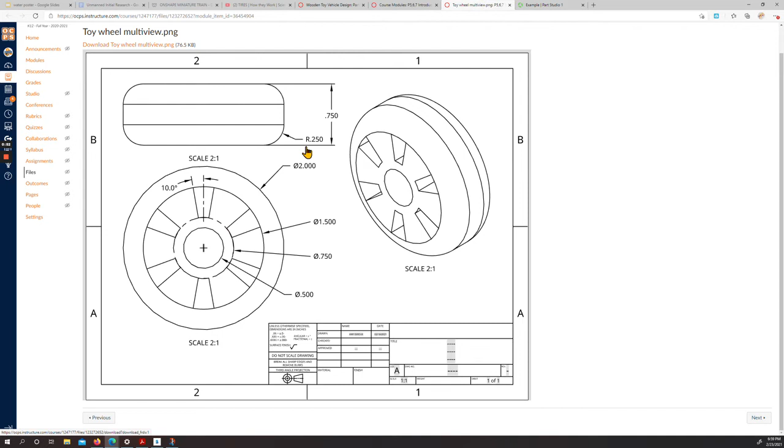We do have our 2-inch wheel. That wheel is given to you in the multi-view, and we need to use this specific wheel for your toy, but otherwise the rest is mostly up to you.

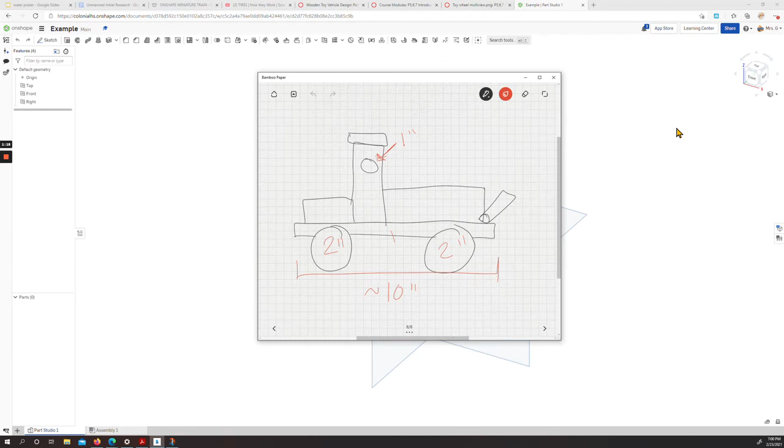This one here has the base, our front end, our cab, our back end, and an openable rear. So we're going to take some time and model out this example, and I'll show you guys a little bit of how we can go from picture to 3D model. Alright, let's get started.

First, we are going to select a sketch on our front plane. I'm going to either choose the N key on my keyboard, or click on the view cube up in the corner. What we'll start with is just getting the general size and shape of our object, but I'd like to start with a center point rectangle to keep everything centered along our initial plane here.

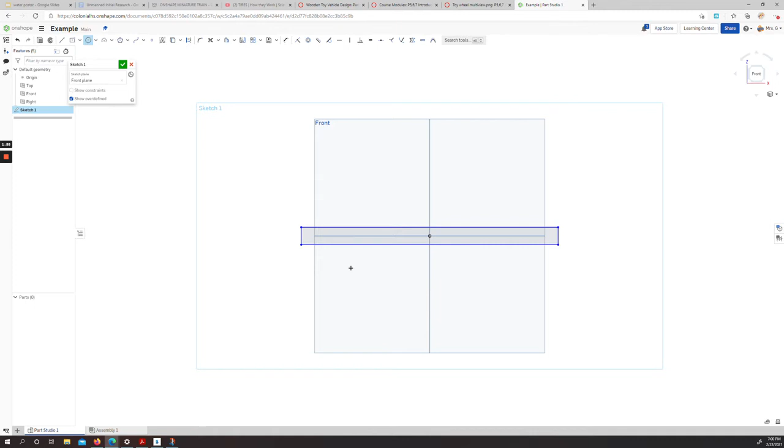So starting out, we're going to have our base, and then I'm just going to make two 2-inch circles down here as placeholders. We will be making these wheels separately, but at least having our wheel size will allow us to get a better handle of what size we would like to create our other shapes.

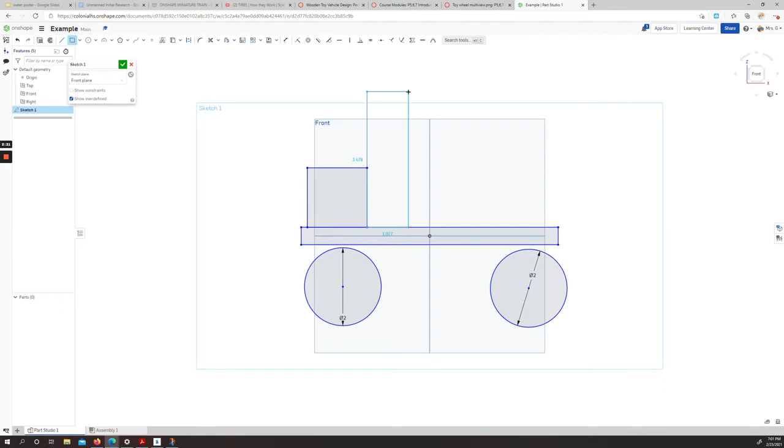In our drawing we had a rectangle, a taller rectangle that had a little roof, and a couple pieces of a trailer bed back here. Just for now, we'll start something like this. This back end needs to change since we'll wind up having movable parts, but at least for the sake of visualization, this is the beginning of our vehicle.

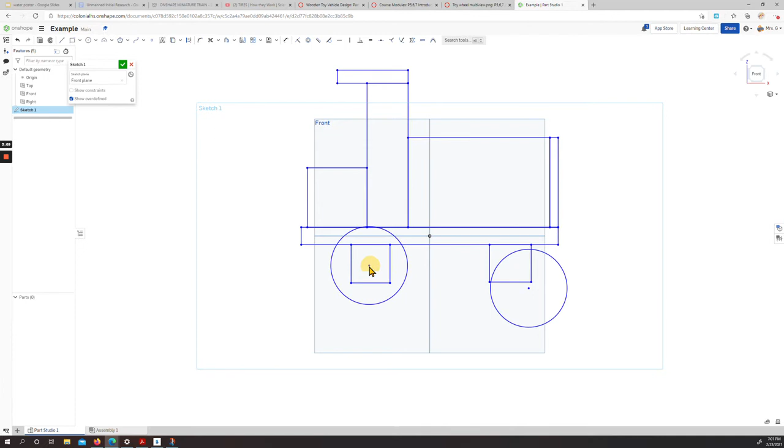If we're noticing, do you remember our train that we created, you guys? We had wheel blocks for our axles to set in. For right now I'm creating two of these just so we can visualize it, but when we actually create, we only need one, because remember in our assemblies we can do multiples.

But this is our general scope of the shape that we wanted in this example. So let's grab our dimension tool and start to give ourselves some sizes here. Most of our measurements we want in quarter-inch increments or so.

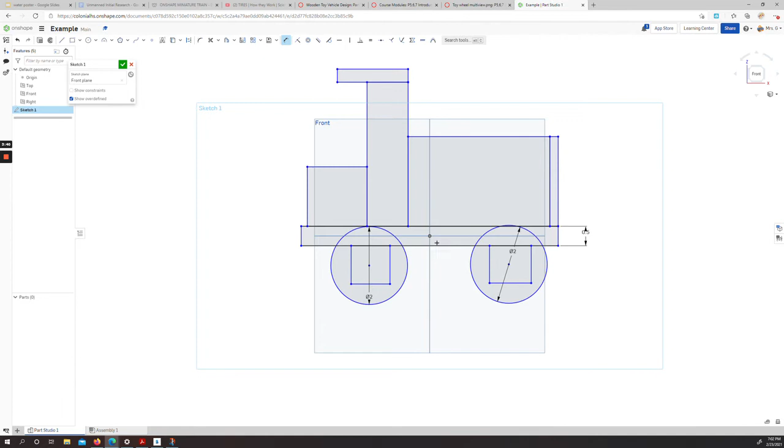So this was about 0.4 something, close to 0.5 inches. This one here is close enough to 7. Again, these are not the same sizes you need to have, but we are trying in general to use whole numbers or quarter, eighth inch increments.

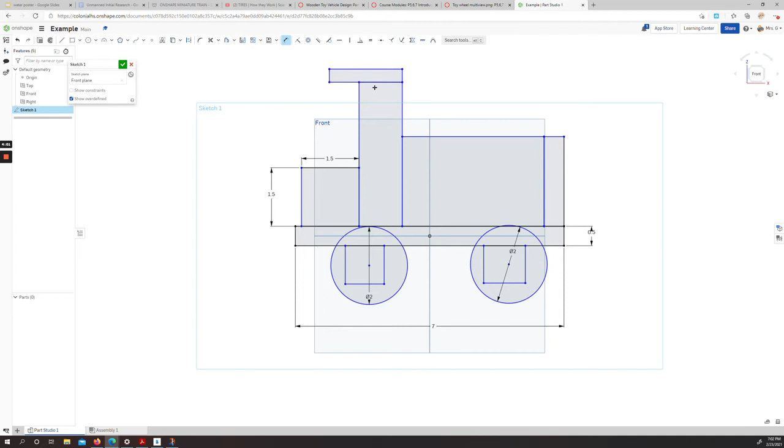Our height of our piece here might be a little too tall, so maybe let's see what 1.5 looks like — probably a bit closer. Our width overall, this is closest to 1 1/2. Our distance within these two is just about 1.

Our rear so far is almost 4. Our tiny little piece back here looks like it's going to be about 1/4 inch, 0.25 inches. We're still missing a couple dimensions to make sure that this is all relatively even, functional, and consistent.

So we do need the height of our little truck, right? Let's say that this is going to be 2 inches. We need the height of our little hood, our little roof — let's say this is also going to be 0.25, our quarter inch. And then we are going to need some size for our wheel block.

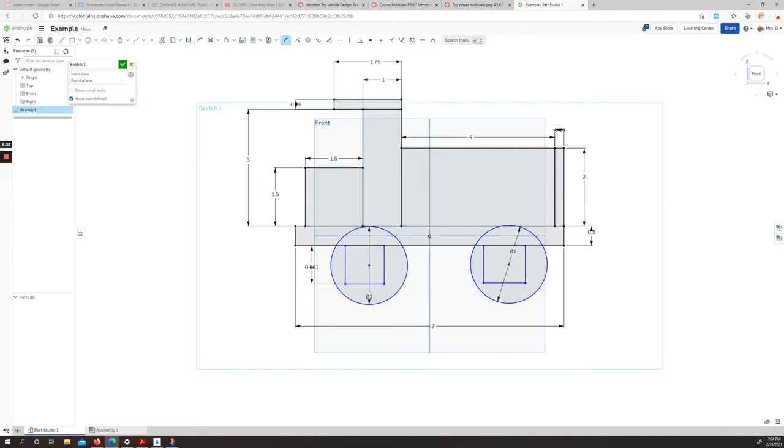These little wheel blocks, let's say that they're going to be 3/4 of an inch by 3/4 of an inch. Again, you may or may not need to do this for both — in this case these are going to be their own object, but I'll at least show both for right now.

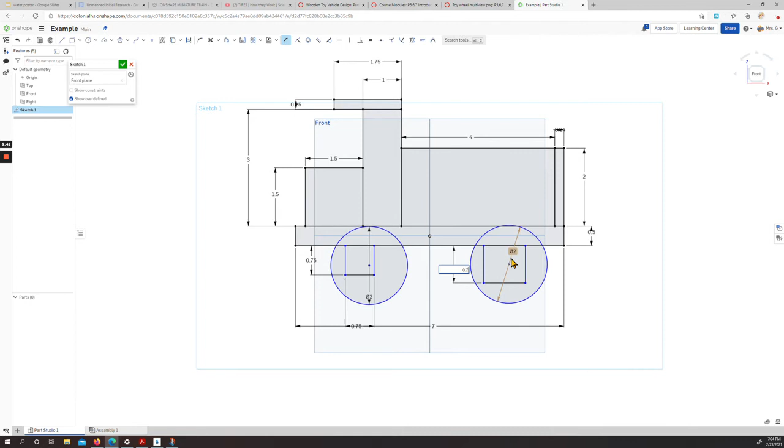Okay, so for locations, we don't need to worry too much. We will worry about our axles soon, but we do need a circle piece in the centers of our rectangles, so I'm going to move one of those over here. We will need a circle in the center of our squares here. This is going to be 0.5 inches, we know that size because of the center of our multi-view drawing in our circle. We could do the same here, those will wind up being the same part, so we don't need to waste too much time on that. These would be along the same set.

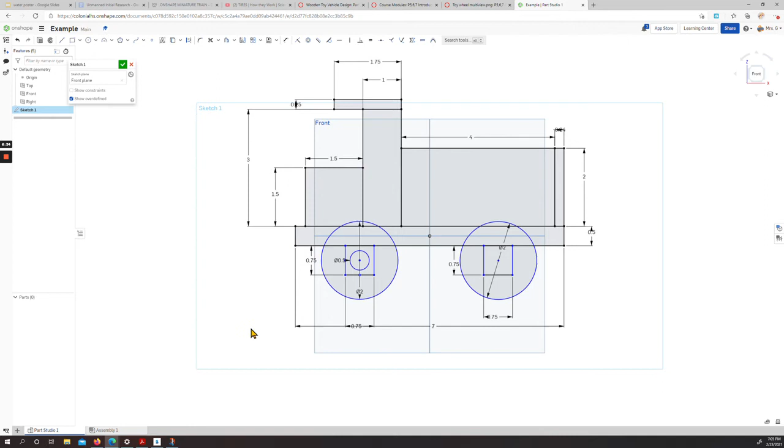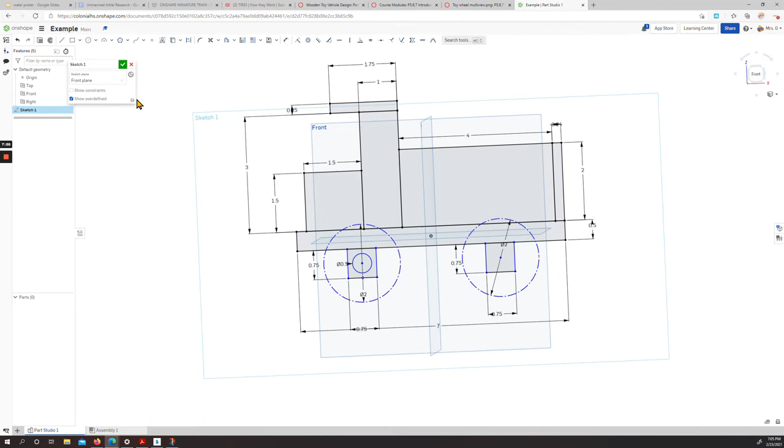Alright, so far this looks a little bit like a truck. So what we're going to do is use this sketch quite a few times to create the parts we would like for our vehicle. I am going to make these circles construction lines since we're not going to need to use them - they were just there for our reference - and I'm going to accept this sketch.

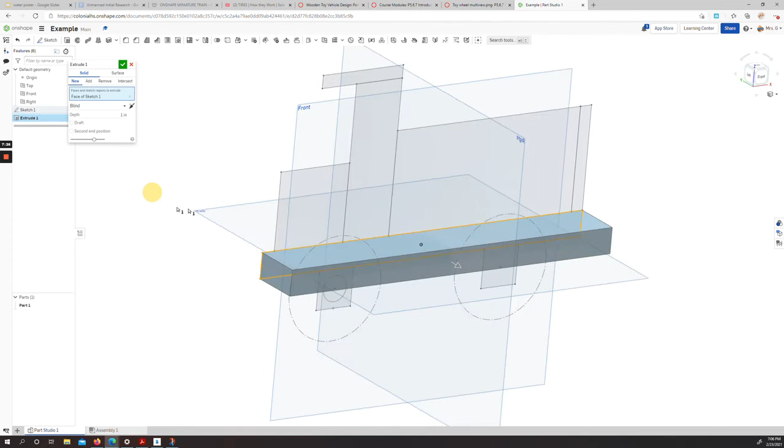Alright, from here we can start using our extrude button to get our base and a few other pieces created. So let's start with our extrude. Let's say we extrude our base. I'm going to choose the symmetric option to make our lives a little easier. Let's say we make our truck 3 inches wide in this example.

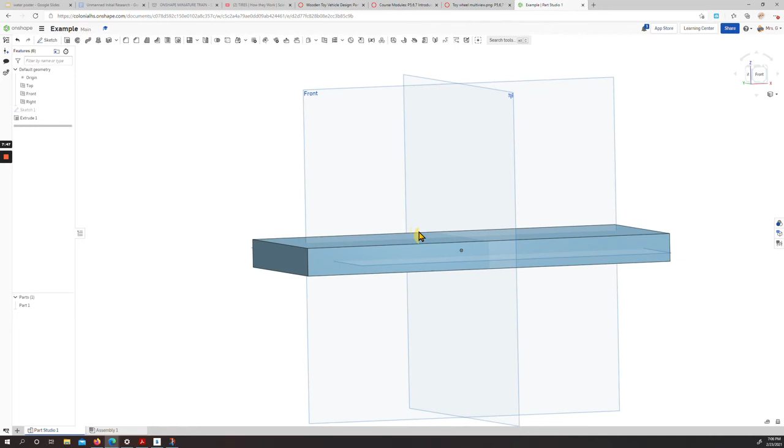So if you notice, our sketch goes away. We don't see it anymore, and we just did all that work to make that sketch. We're going to come back over here to the left in the browser, our feature list, and click on the little eyeball so we can see it again. Now we can actually go through and use this same sketch to make the rest of our pieces.

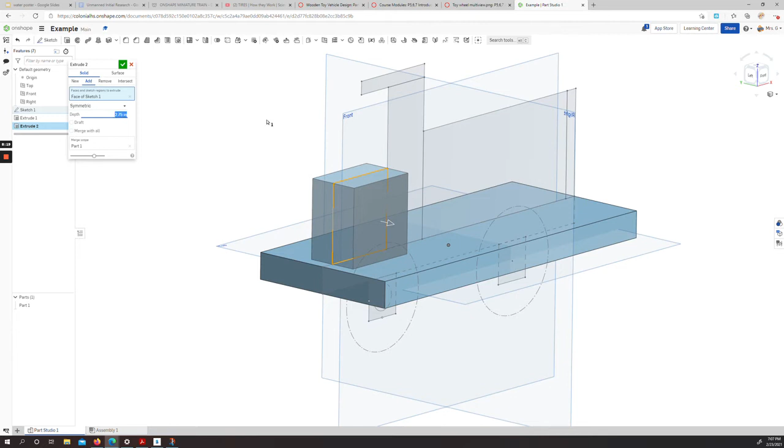So I'm going to extrude. Let's say we'll extrude our hood. This was our 1.5 by 1.5 piece. We're going to do our symmetric again, and maybe we want it to be just within the sides of our base. So maybe let's put 2.75. Okay, we got our little hood here.

But if you notice, right now these are two of the same color. For what we need to do for our project, we need multiple pieces that we can assemble. These would be two separate blocks of wood when we're assembling. So we'll need to double click on our extrude, or right click and edit. We actually want to put new up in our options at the top here. We accept that. When we see these change color and see multiple parts along the bottom here, then we know that we have successfully created multiple parts.

Okay, what we could do to make your lives easier later on is right click in this menu and rename these pieces. So these don't necessarily need specific names. Let's say this is our base, this is the hood of our car.

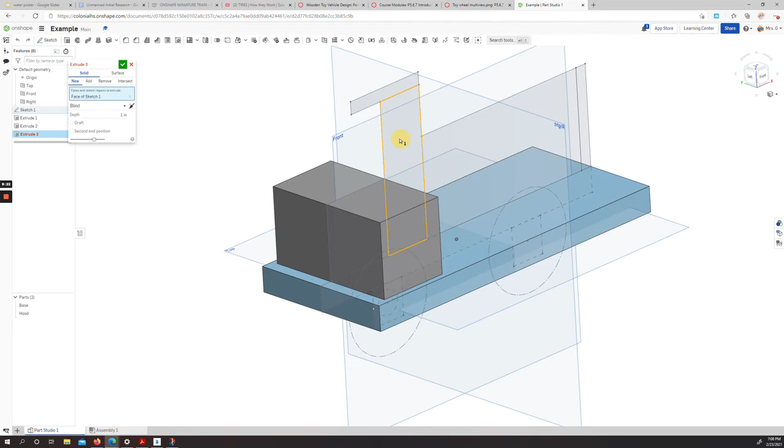Alright, then we'll start extruding some of our other pieces. Our cab piece is going to be the full 3-inch size, but again it needs to be symmetric. It is still new. Okay, we have our piece here. Let's rename that, make sure we stay organized.

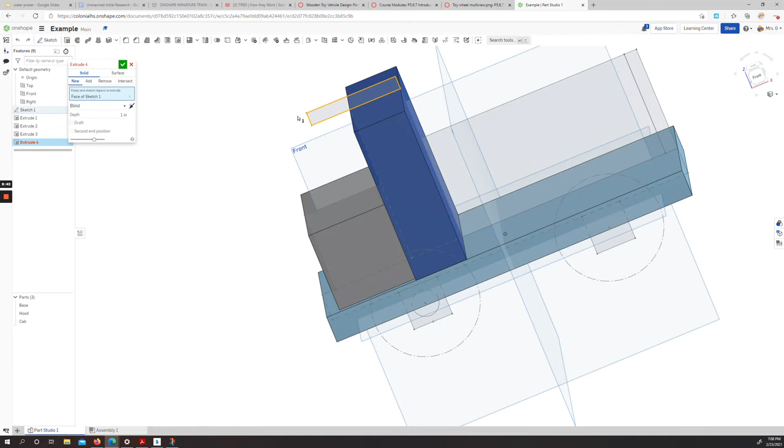Alright, our little roof, we're going to extrude again to 3 inches symmetrically, but again this needs to be new. So we right click, let's rename, that's our roof.

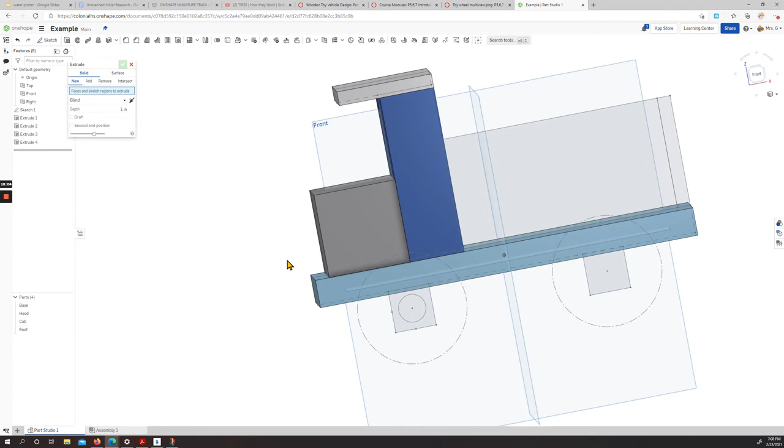As you see, we're starting to get multiple pieces of our vehicle. Alright, let's do our wheel block. So we'll extrude symmetric. We're going to make this 3 inches as well, but we do again need to choose new so that we can use this again. We right click - oop, I misclick - we right click and rename. This is our wheel block.

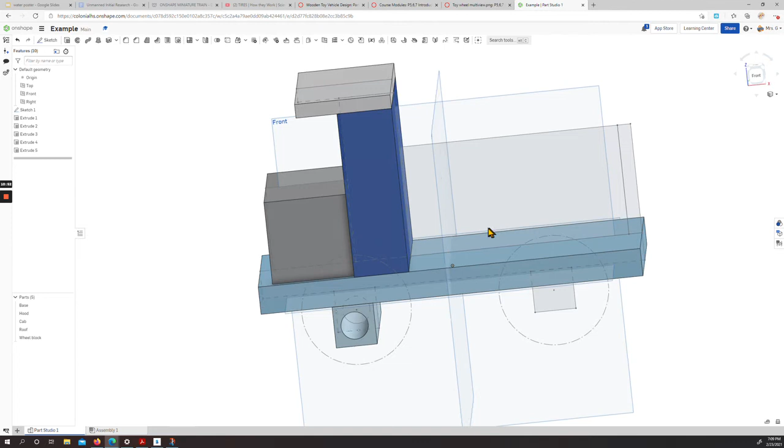We're almost there. Now these are the pieces that we kind of need to think about. The rear of our vehicle would actually really be a box with a few slices of wood, basically. So what we may need to actually do is edit this sketch to add a little more detail in here. So what we'll start with, let's go back to our original sketch.

I'm going to double click and choose N so that we can view it normal. I'm going to create one new little rectangle here and dimension this distance to also be 0.25, that quarter of an inch, the same as our rear. I'm going to accept that sketch.

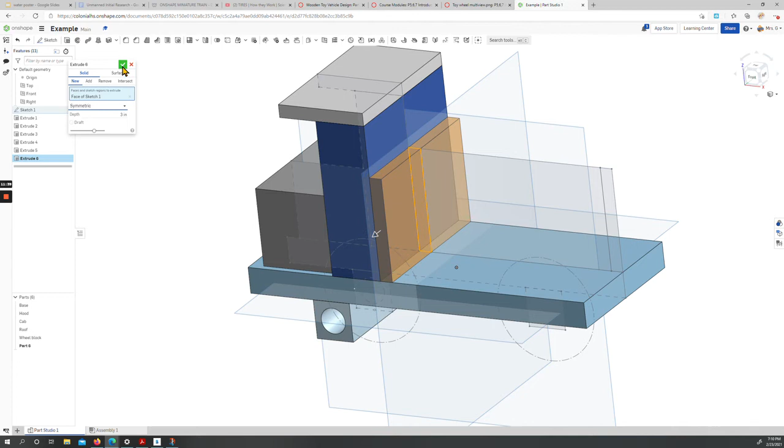Alright, and let's make our first piece of our truck bed. I'm going to extrude this piece. It's going to be our full 3 inches. It's going to be a new part, and it's going to be symmetric. And I accept that. Alright, we have the front portion of our truck bed.

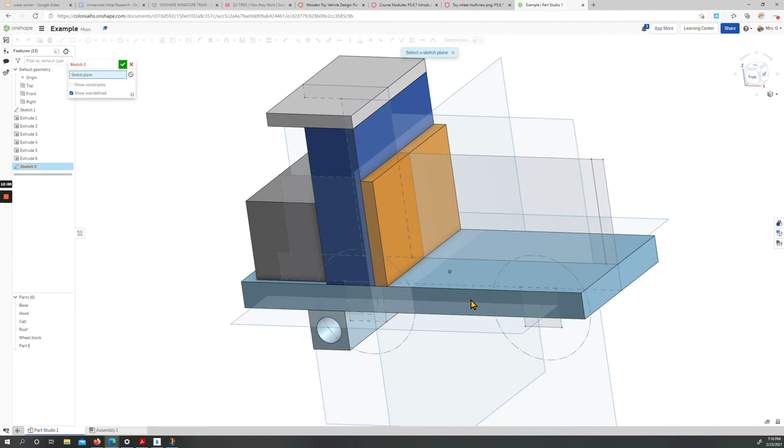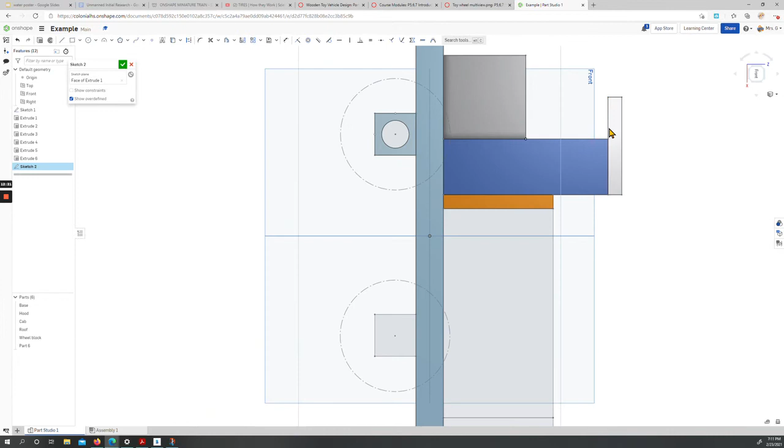This middle piece that we have here, we do need, but we don't need it actually on this plane that it is. We need this along the 2 edges of our truck. So what I'm going to do is start a sketch. Instead of choosing one of the original planes, I'm going to choose that front edge of the truck. So now when I view normal to, it's still on the same view - we still look at the front side. But now, if you notice the plane that's been created, it's along the front edge of our truck.

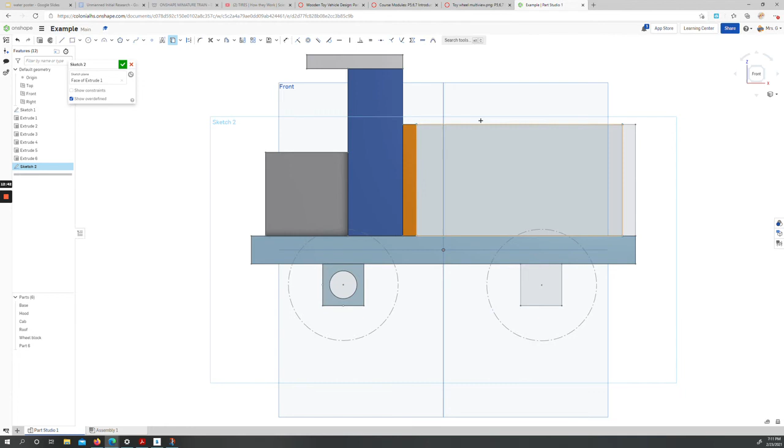We could redraw our rectangle and measure things out, but that takes a lot of time and effort. Instead, we're going to use the Project button up top. Click on that, then click where our rectangle is. If you notice, it takes that same box and pushes it all the way out to the plane we're trying to work on, so you don't have to remeasure anything.

We're going to accept that sketch and extrude this. In this case, opposite direction, so we can use our little arrow, and we only want this to be 0.25 inches.

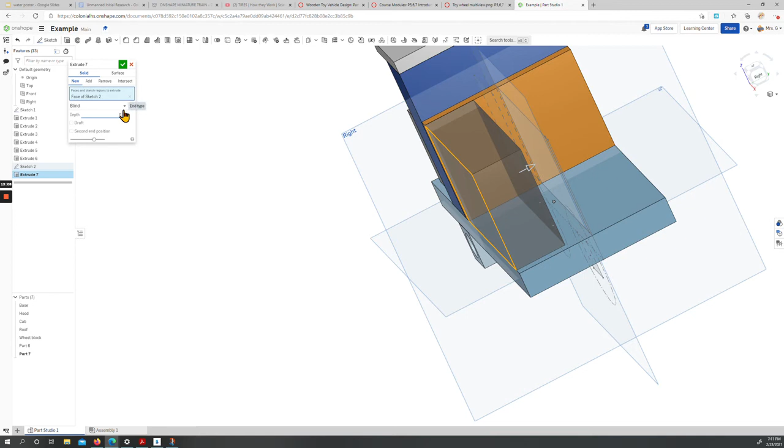Alright, so we have most of our portion so far. This piece here we've got to rename - this is the front bed panel. Okay, this is going to be our side bed panel. We don't need to remake this side panel for the other side since we'll be doing that in our assembly. But we do need to figure out how we're going to connect our little moving piece back here.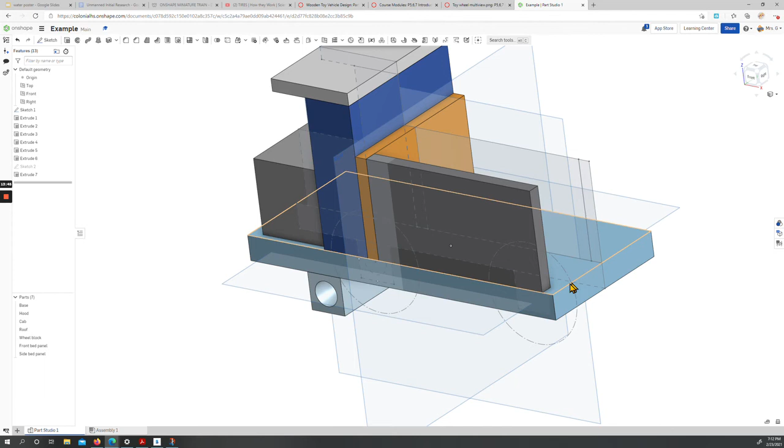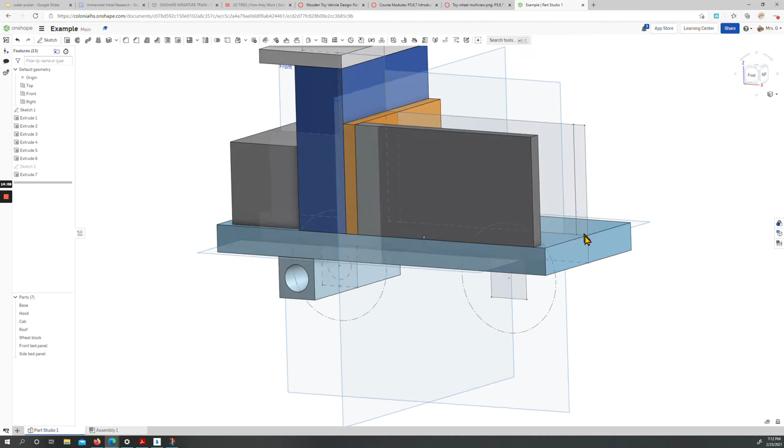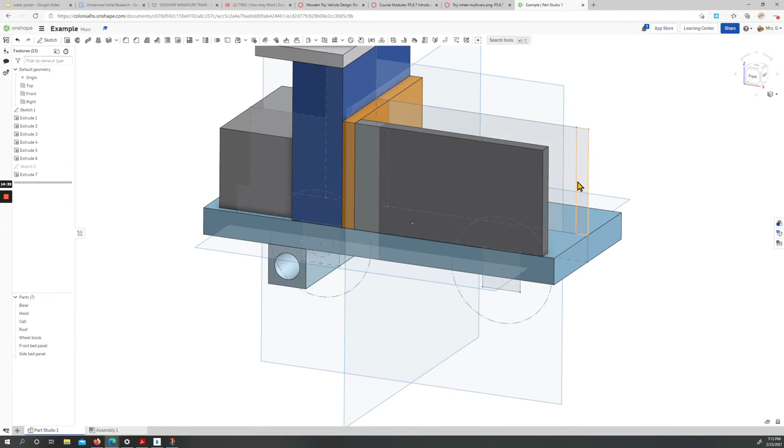So we have a couple ways we could do this. We could create an axle with some tabs - let's do it that way. What we're going to try is make a circular loop that'll sit on here, that'll have an axle through it, and be able to attach to our little back panel.

Alright, so if we want to start doing something like that, let's edit our sketch again. We'll double click on our first sketch and view normal to it, and we're going to have a little axle, which we're going to pretend we have access to. This is going to be 0.125, so 1/8 of an inch.

And then we're going to make a larger circle inscribed. Oop, that is not 5, but 0.5 inches.

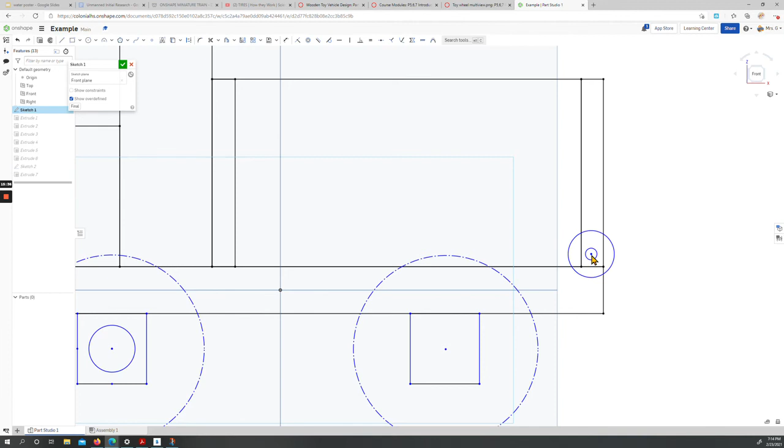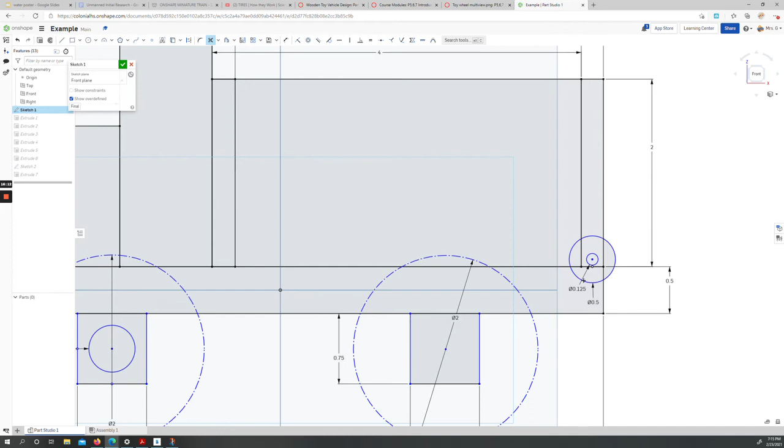And we'll scooch this down a little bit. Again, we're not really using specific measurements at this point, and that's okay. I am going to use our trim tool, our little scissors, and we'll trim out some of the extra pieces of the circle. Now that I'm looking at it, I'm realizing this is very tall - maybe we'll do 1/4 inch instead, so we have less space sitting in between there.

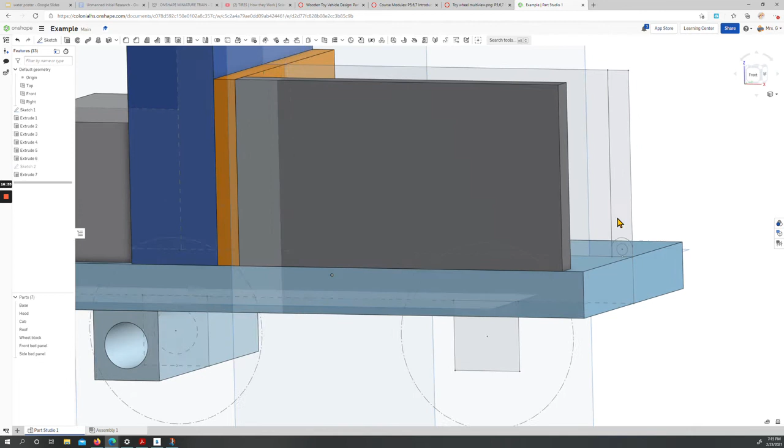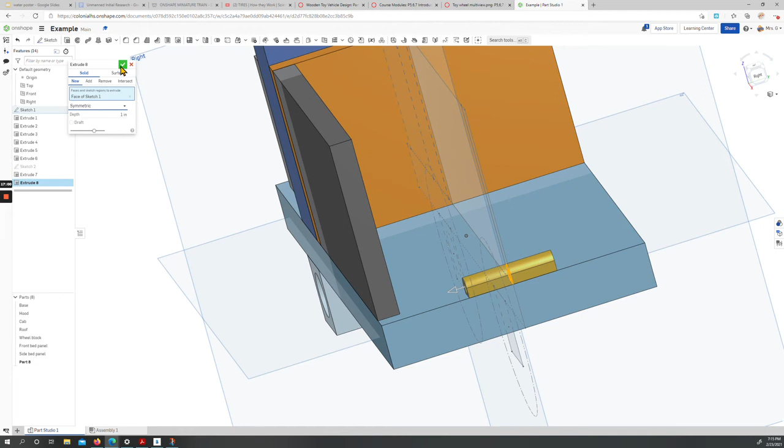So I'm going to accept that, and let's extrude this as our new part. We're going to do this symmetrically, and we're just going to leave this at 1 inch. We're going to need to create our base piece, basically with some holes for an axle to go through it, and let's figure out how we're going to do that. So let's accept that there.

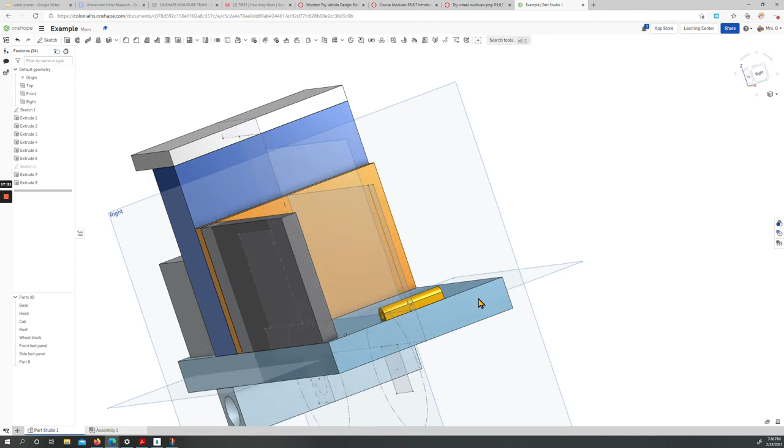Originally our rectangle we were just going to create from this sketch, but instead, now that we're looking at it, we do need our rectangle to have this perfect gap in the middle if we want this to turn correctly. So just like before when we needed to make a new sketch on a new surface, this time we're going to click on the rear of our truck.

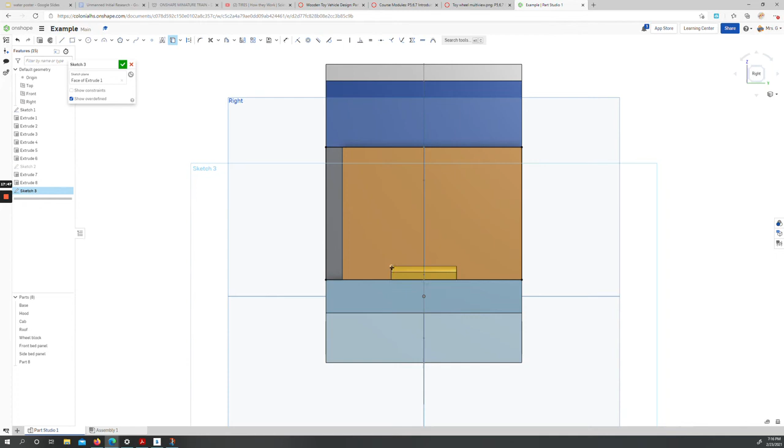I'm going to view normal to, and I want to create a rectangle using a lot of these lines. So I'm going to get that project tool, click on the rectangle face we have here, and I'm also going to click on this little bump that we've created.

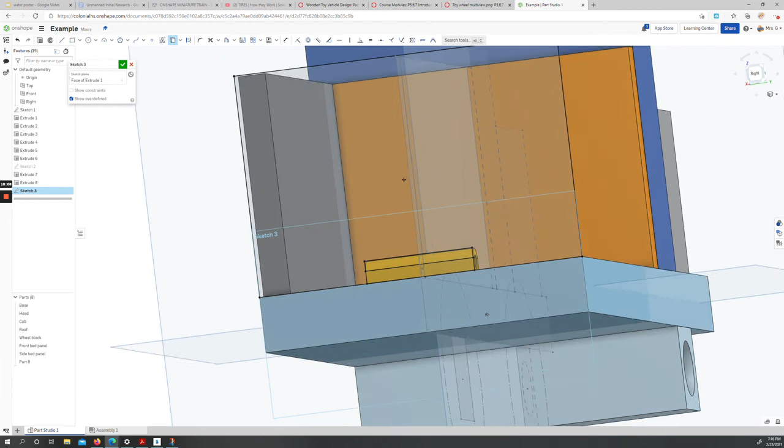If I turn, I can see the general size and shape. I can see we're missing a couple lines here - we're close, so I'll click this edge and this edge. Okay, so now we have fully enclosed surfaces here. Alright, so we are going to accept - that's as easy as it can be.

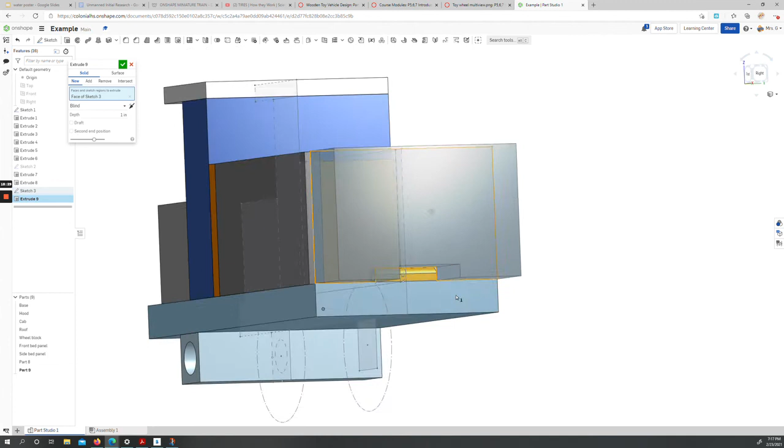I'm going to start hiding some of the planes - I just clicked the P button to hide most of our planes. And we are going to extrude this little shape. By default it should omit the little curved section we just tried to select around. We need this to go the opposite direction, so it's going towards our shape. This is going to be 0.25, and we're going to accept.

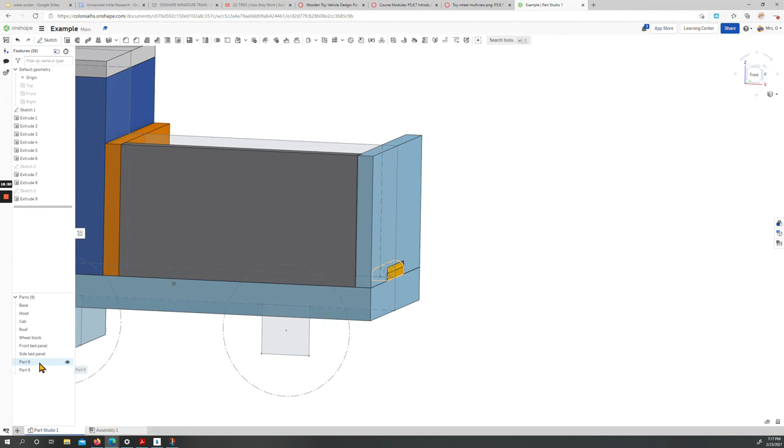Oops, but, oh, never mind, it just circled back to the other piece. Alright, so we're going to right click and rename this our rear axle holder - we're just making up names at this point.

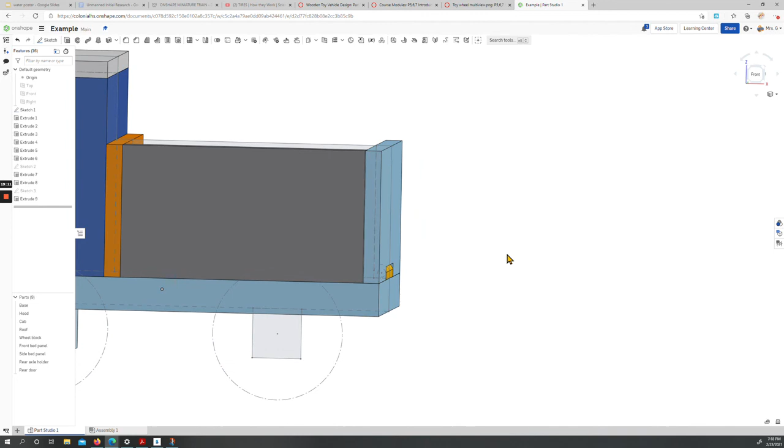Rear door. Okay, and we're pretty close here. So what we need is a hole to go through the base of this piece. We're actually going to need some curves on this too, when we really think about it. But for right now, what we're going to worry about is at least sticking a hole through there, and then we'll curve it off. Okay, so we're going to sketch on the same side.

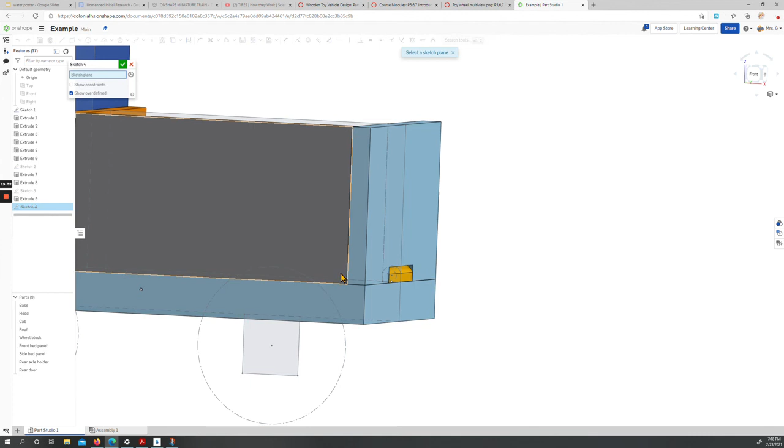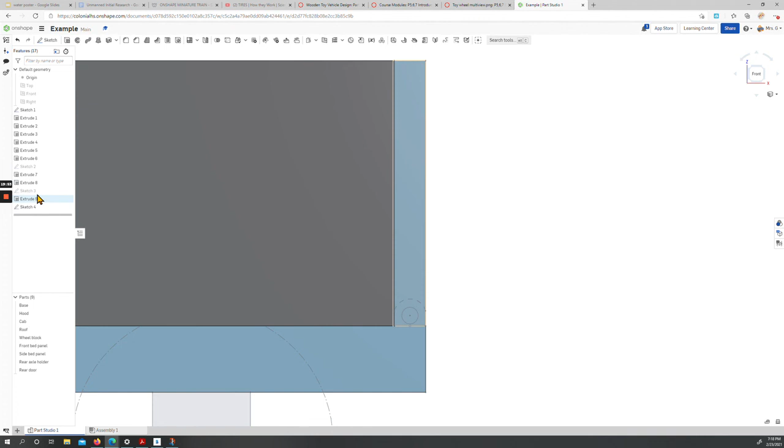Right, and we want to use the hole. And now that we're realizing it, as I'm saying this, it would really be helpful if this was a full circle that we could use to curve the back end here. So what I'm going to do, as my voice continues to die, which is always really nice. In a sarcastic kind of way.

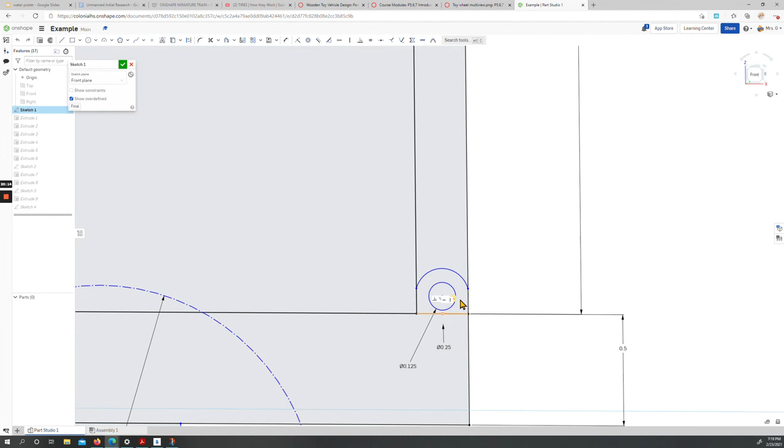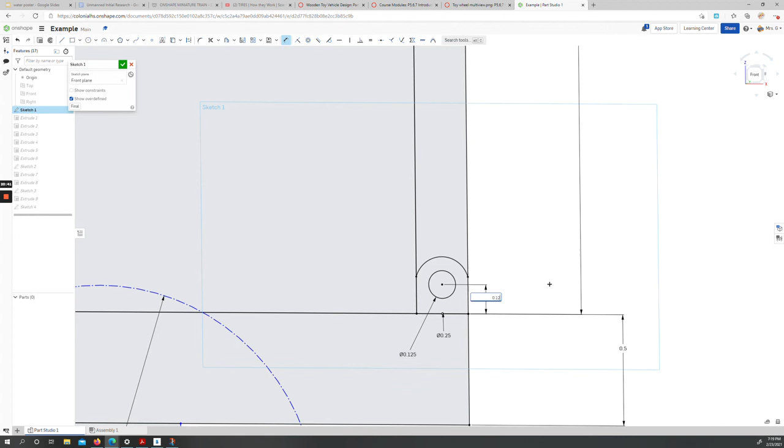Alright, our sketch 3 - nope, not sketch 3, sketch 2. Nope, I am forgetting that this was all the way back in sketch 1 that we just added. Alright, we are going to make sure that this is going to be enough to hold a full circle. Okay, that's not the most effective way of doing it. So we'll measure this out and say that this is... that doesn't seem quite right, but 0.125.

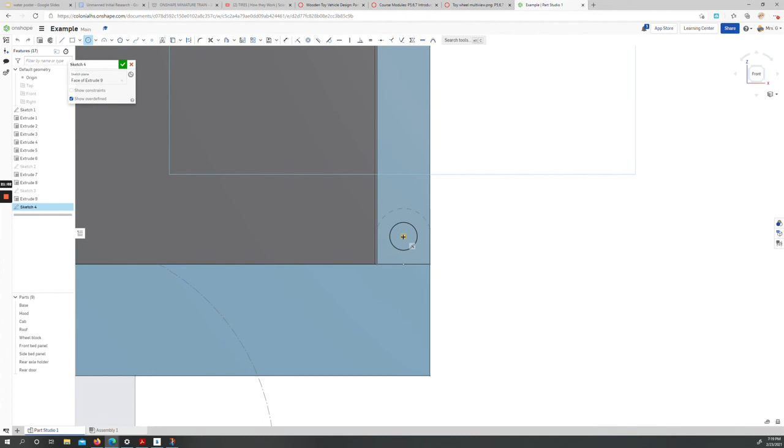Okay, we should be good on that run. Okay, so it automatically heightens it, adds the height, and automatically cuts out into this portion. Alright, now we're good to start taking a look at this back end here. If you notice it actually moved the circle as well, and then we're going to add our own nice little circle here. Alright, that'll meet with the end. Yeah. Alright.

Actually, no, we're going to undo that. We're going to do this again. And I want it to be tangent to the edges over here. So I'm just going to make a circle, connect it to the side. Alright, and then we're going to trim. Except I didn't use the Use button yet. So we're going to use this side.

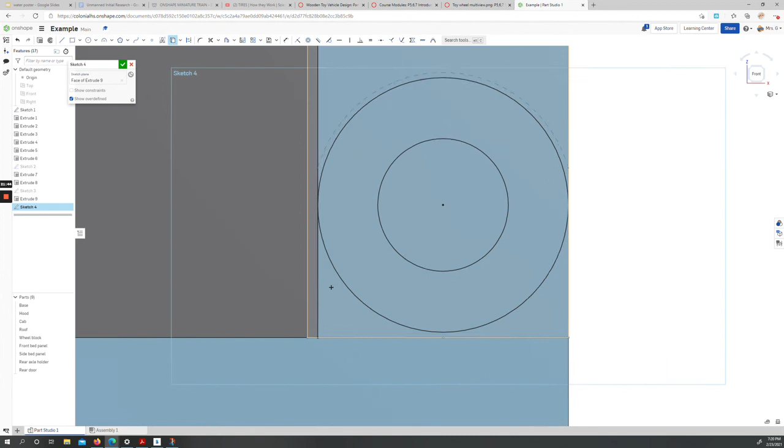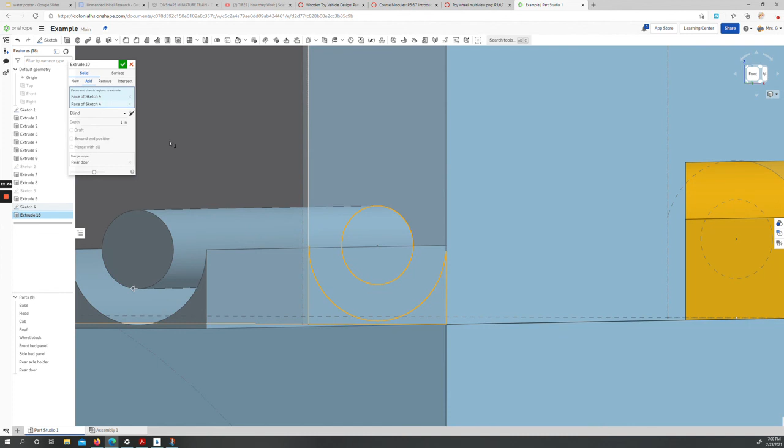Hopefully, come on. There we go. Alright, and then we should be able to trim this portion off. So what we're going to wind up doing is actually using our Extrude Remove tool. So if I hit Extrude, I choose my little corners and my center. These need to remove through this part.

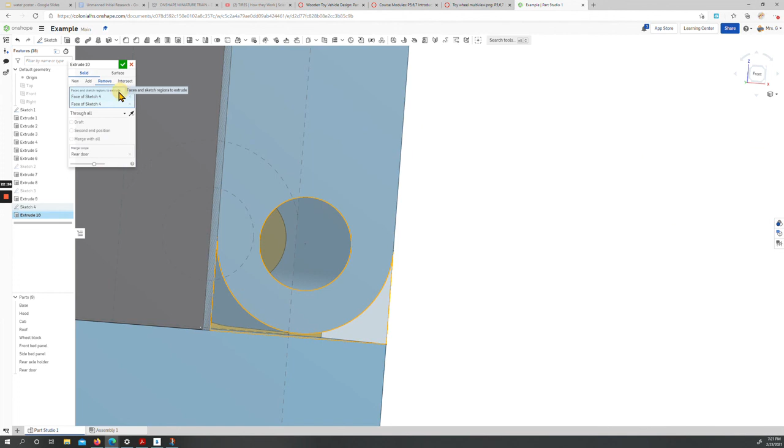Okay, oops, we are missing a tiny little piece here. That's the piece that I was looking at before. We were trying to find it. Okay, we're intersecting for some reason. So we will have to fix that. Alright, let's click on...

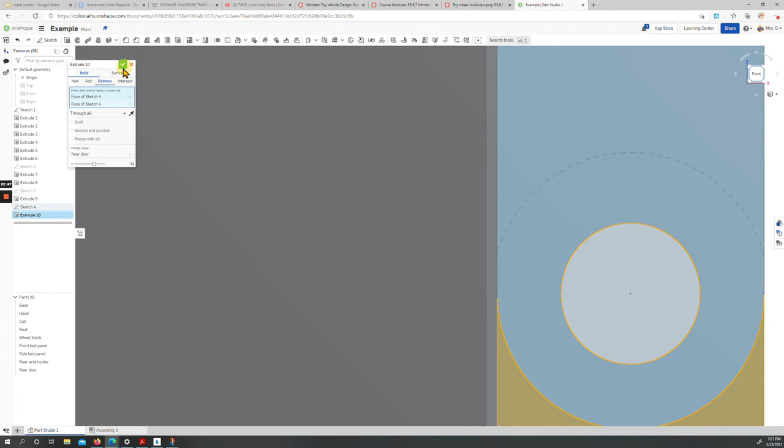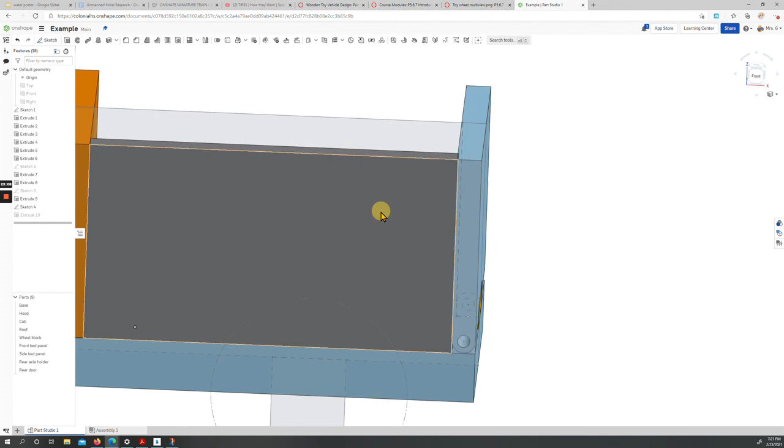Alright, if you got this far, and yours is doing this, it's a little problematic. Slightly. But we'll accept this for right now, since it seems like in our sketch, since I expected our shape to not be intersecting, that we have an issue. Alright, for the sake of us being able to do this, we're just going to make our lives a little easier and take a look at this extrude.

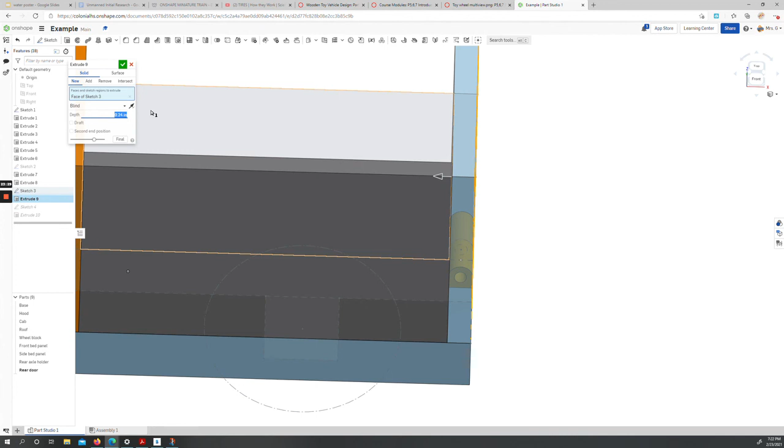Okay, nope, did not want that. Alright, we're going to make this slightly smaller. Okay. In actuality, it would be best to go change both pieces, but for the sake of our sanity for today, we're doing it the way we just did.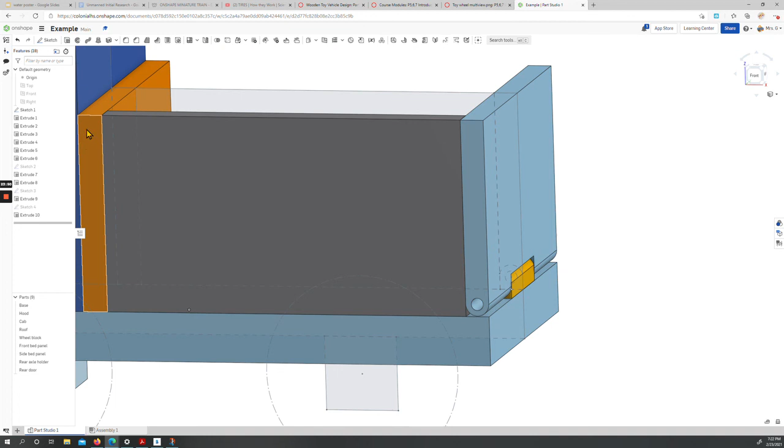Alright, almost final things here. Alright, we need an axle for our wheels and an axle for our little pin here. So for our final pieces, we're going to extrude once more. Okay, we need this center circle here. Alright, all the way in the middle. We want this to be symmetric, and we need this to be the full 3-inch.

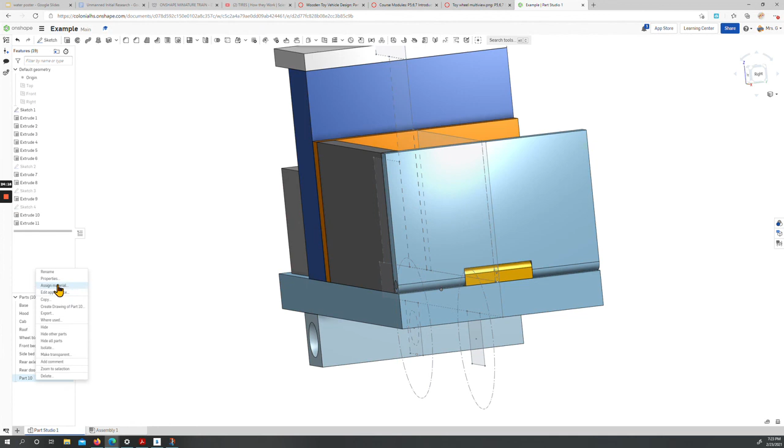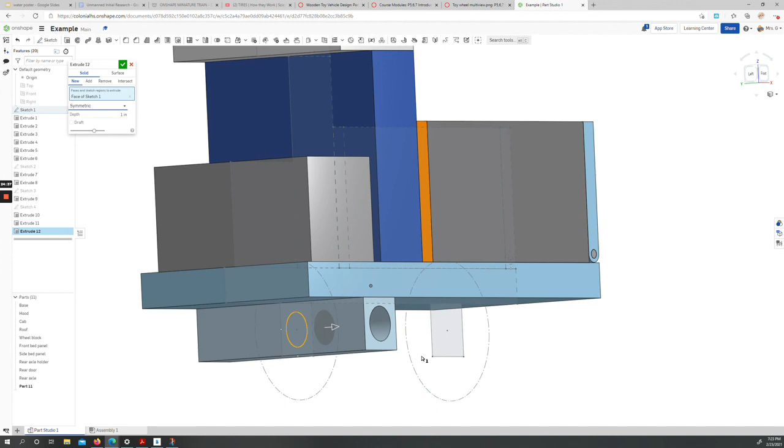Okay, that's our rear axle. Alright, and then our wheel axle here. We take our circle. We are making a new piece. It is symmetric. Okay, the only thing with this is that it needs to be wide enough to go through the entire shape. Originally, that's the 3 inches, but it actually needs to stick out just enough for both wheels to fit on.

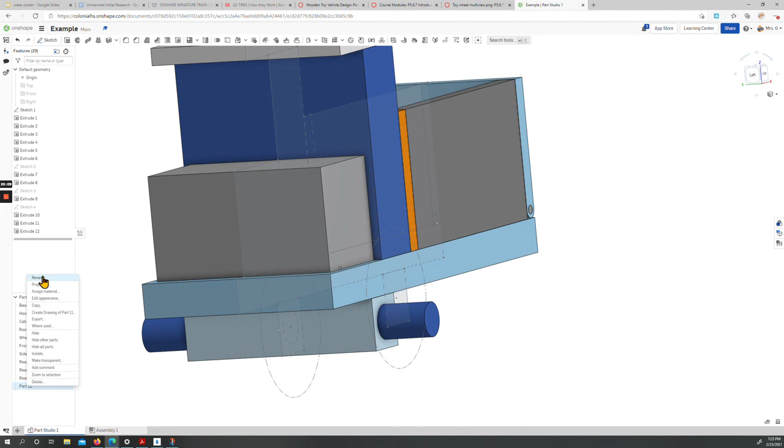So each wheel is 0.75, three-quarters of an inch. So that's 1.5 inches added. So we can either do the math in here, or if you feel like it, in your head. So this is 4.5 inches. We accept. We rename this to our axle. Okay, and for our simple truck, these are all of our pieces for now.